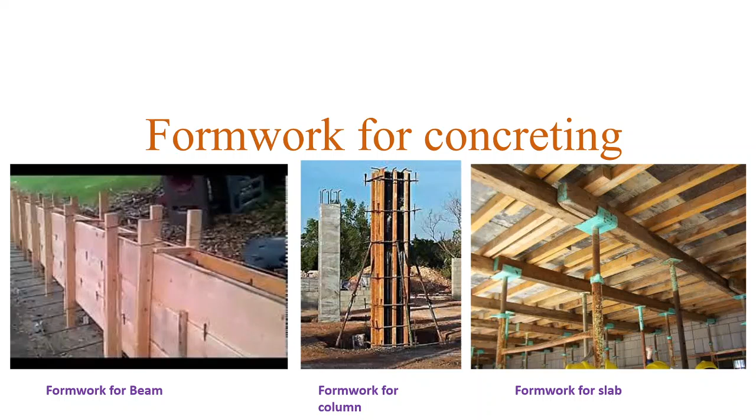Now, what is formwork? Formwork is a mold in which fresh concrete is placed to get a desired size and shape. In this slide, you can see formwork for beam, formwork for column, and formwork for slab. The props here that you see in the formwork for slab are known as centering. So formwork is a mold, and whatever temporary structure is prepared to support that formwork is known as centering.

What is formwork? Formwork is the term used for the process of creating a temporary mold into which concrete is poured and formed. Traditional formwork is fabricated using timber, but it can also be constructed from steel, glass fiber reinforced plastics, and other materials. Formwork is an ancillary construction used as a mold for a structure. Into this mold, fresh concrete is placed only to harden subsequently.

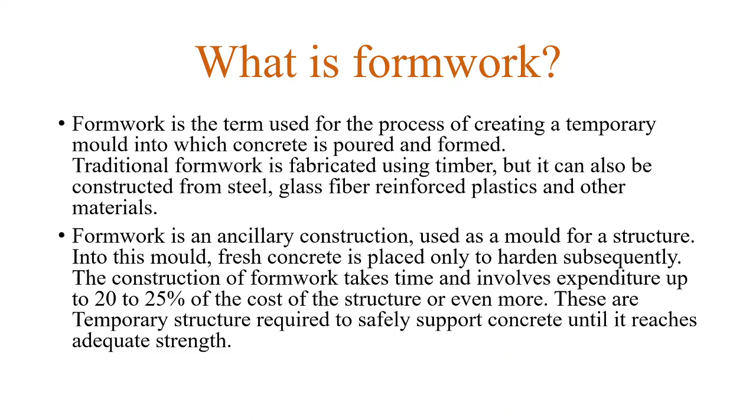The construction of formwork takes time and involves expenditure up to 20 to 25% of the cost of the structure or even more. These are temporary structures required to safely support concrete until it reaches adequate strength.

What are the functions of formwork? Formwork molds the concrete to the desired size and shape and controls its position and alignment. Formwork also acts as a temporary structure that supports its own weight plus the freshly placed concrete plus construction live loads, that is material and human. Formwork is a classic temporary structure in the sense that it can be erected quickly and it is highly loaded for a few hours during the concrete placement. Within a few days, it is disassembled for future use like any other temporary structure.

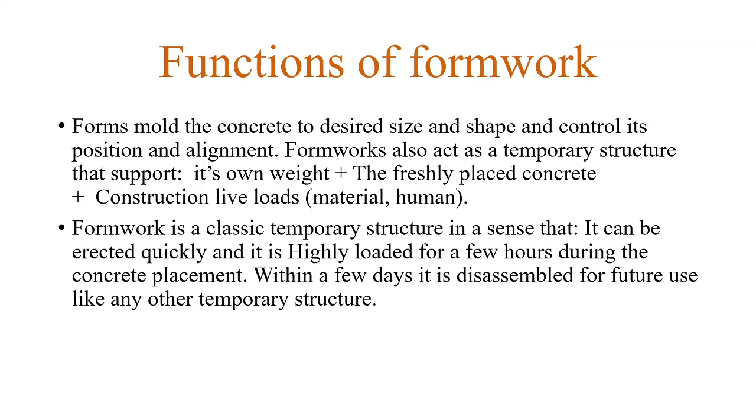What are the characteristics of good formwork? Or we can say, what are the requirements of a good formwork? It should be safe and cost effective or economical. High quality, finished concrete surface is of acceptable quality in the correct location. It is able to produce the required shape and surface. It should be strong enough to withstand all types of dead loads and live loads.

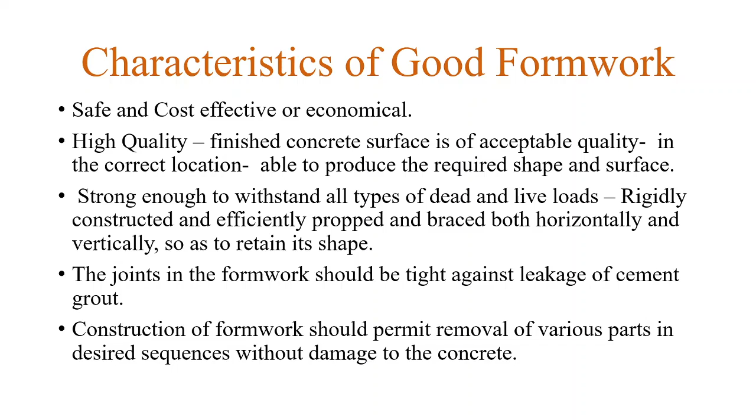Rigidly constructed and efficiently propped and braced both horizontally and vertically so as to retain its shape. The joints in the formwork should be tight against leakage of cement grout. Construction of formwork should permit removal of various parts in the desired sequences without damage to the concrete. The formwork should be set accurately to the desired line and levels and should have a plane surface.

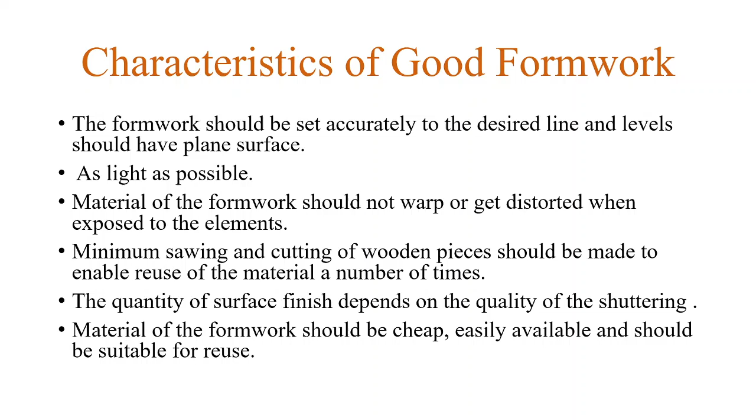The formwork should be as light as possible. Material of the formwork should not warp or get distorted when exposed to the elements. Minimum sawing and cutting of wooden pieces should be made to enable reuse of material a number of times. The quality of surface finish depends on the quality of shuttering. In short, material of the formwork should be cheap, easily available, and suitable for reuse.

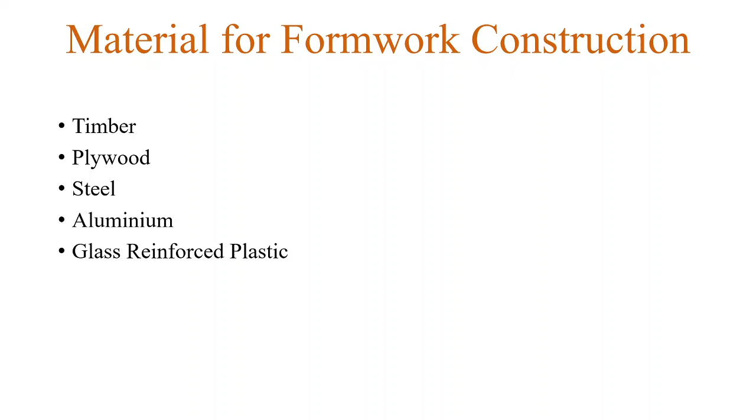What are the different materials used for formwork construction? Timber, plywood, steel, aluminium, and glass reinforced plastic. Out of that, let us see timber shuttering. What are the characteristics of timber shuttering? What is the specialty of timber shuttering? Easy handling because of its light weight, easy to remove. Damaged parts can be replaced with new ones. Very flexible, can't be used for long, has limited reuse. It can only be reused 5 or 6 times.

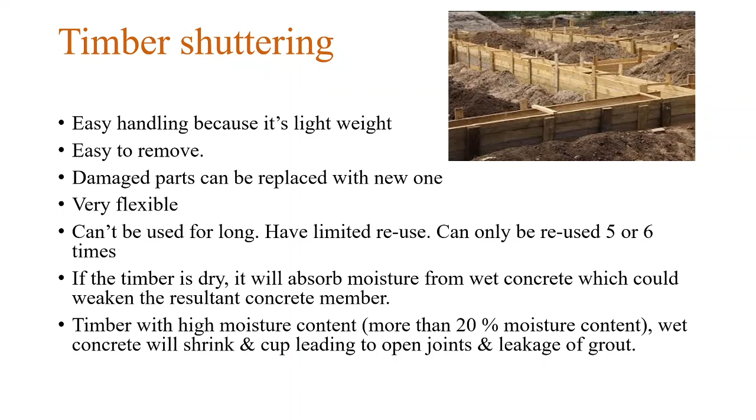If the timber is dry, it will absorb moisture from wet concrete, which could weaken the resultant concrete member. With timber of high moisture content, that is more than 20%, it will shrink and cup, leading to open joints and leakage of grout.

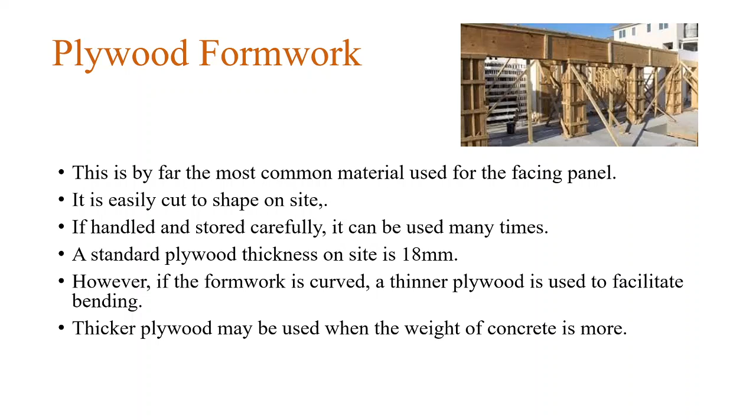Plywood formwork. This is by far the most common material used for facing panels. It is easily cut to shape on site. If handled and stored carefully, it can be used many times. A standard plywood thickness on site is 18 mm. However, if the formwork is curved, a thinner plywood which can be easily bent can be used. Thicker plywood may be used when the weight of concrete is more.

Steel formwork. Steel forms are stronger, more durable, and have a longer life than timber formwork. Their reuses are more in number. Steel forms can be installed and dismantled with greater ease and speed. The quality of exposed concrete surface using steel forms is good, and such surfaces need no further treatment. Steel formwork does not absorb moisture from concrete. Steel formwork does not shrink or warp.

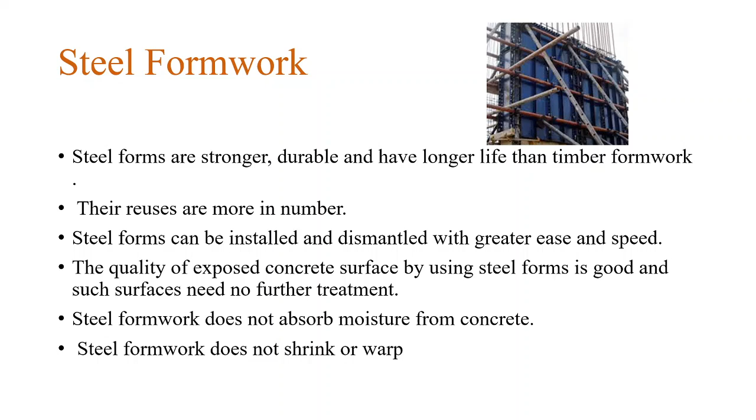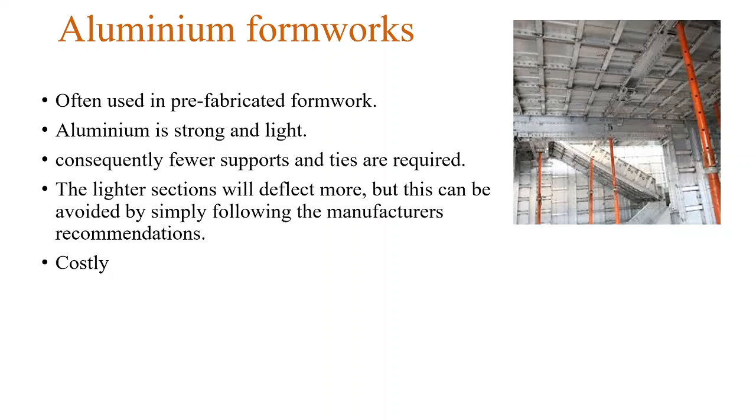Aluminum formwork. Often used in prefabricated formwork, aluminum is strong and light. Consequently, fewer supports and ties are required. The lighter sections will deflect more, but this can be avoided by simply following the manufacturer's recommendations. It is costly.

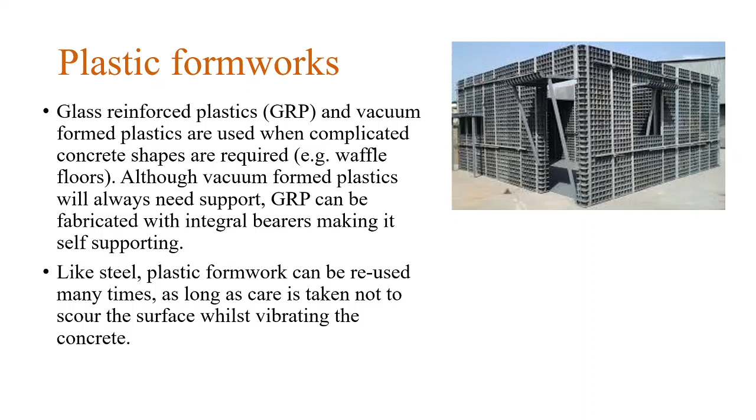Plastic formwork. Glass reinforced plastic (GRP) and vacuum formed plastics are used when complicated concrete shapes are required. Although vacuum formed plastics will always need support, GRP can be fabricated with integral bearers, making it self supporting. Like steel, plastic formwork can be reused many times as long as care is taken not to scour the surface whilst vibrating the concrete.

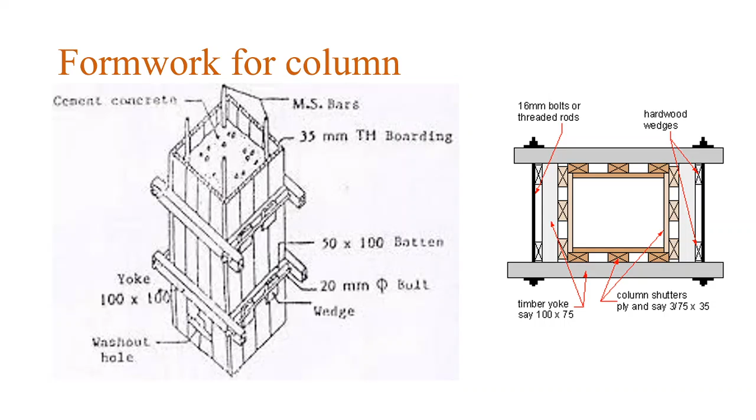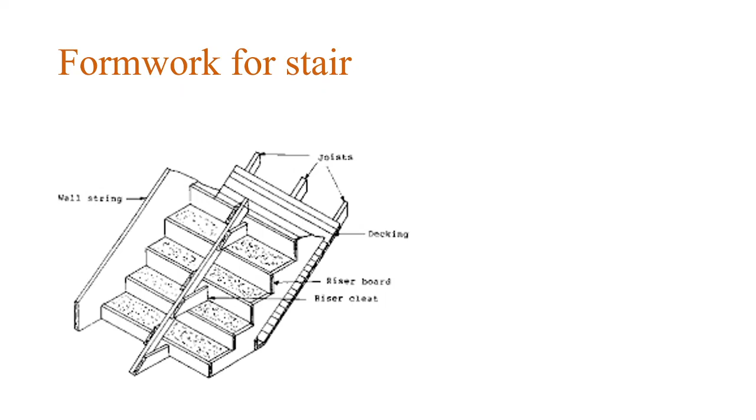These are some sketches of formwork for the MSBTE examination of the concrete technology subject. Often sketches for column formwork, formwork for concrete wall, formwork for slab and beam, and formwork for stair are asked, so students should practice drawing these sketches from the examination point of view.

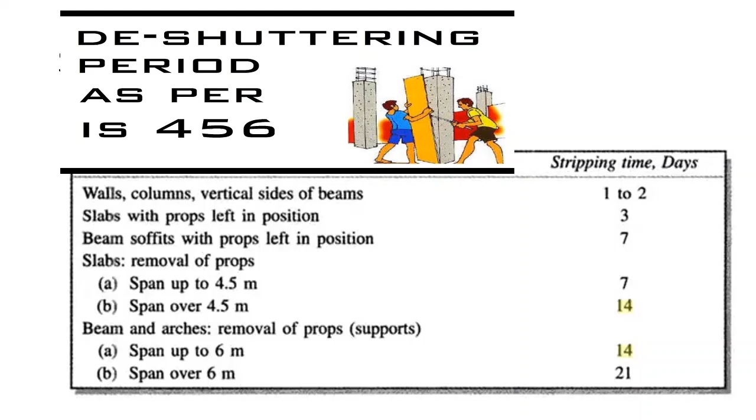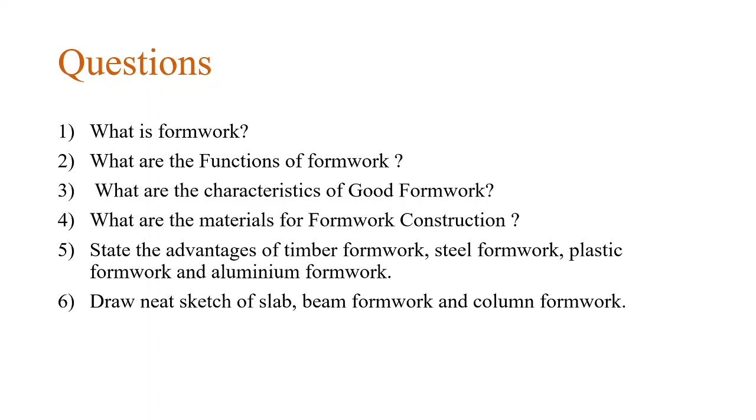Now these are the questions frequently asked in the MSBTE theory examination of the concrete technology subject. What is formwork? What are the functions of formwork? What are the characteristics of good formwork? Or it may be, what are the requirements of good formwork? What are the materials for formwork construction? State the advantages of timber formwork, steel formwork, plastic formwork, and aluminum formwork. Draw neat sketches of beam, slab beam formwork and column formwork.